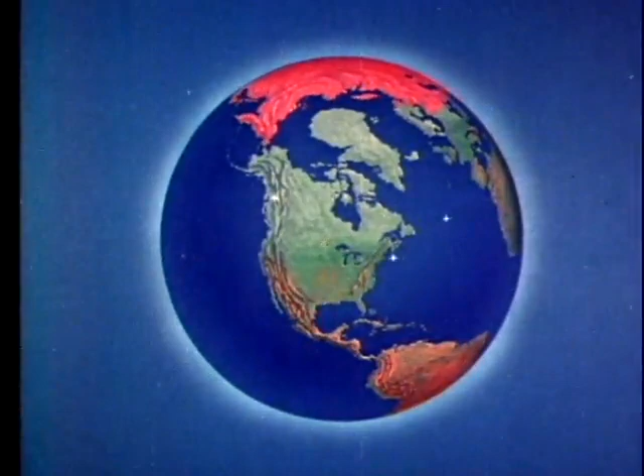Sprawled across North America, from the polar ice cap to the Mexican border, is a giant with 1,000 eyes. Day and night, fair weather or foul, he guards his homeland. This giant is the air defense system of North America, a vast and intricate maze of radar networks. And through the electronic eyes of this giant, we are able to see the enemy before the enemy sees us.

These radars never sleep. Round the clock, they stand ready to do their part in minimizing the penetration of enemy bombers. And round the clock, their quietly pulsing hearts, the magnetrons and the klystrons, help generate the power for peace that keeps America strong.

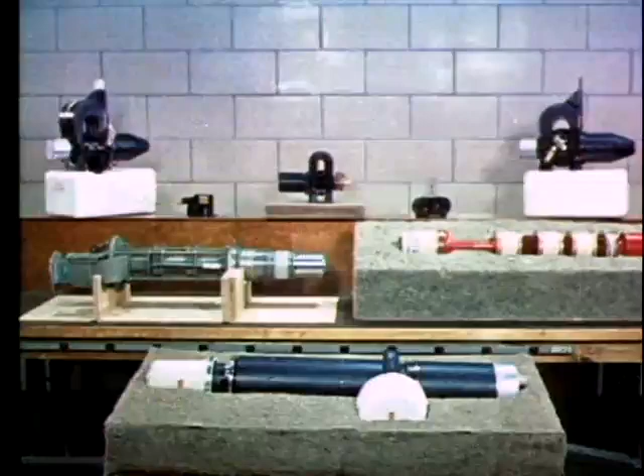These microwave power tubes, the magnetron to generate the radar signal, the klystron amplifier for radio communication, and radar are the subject of our story.

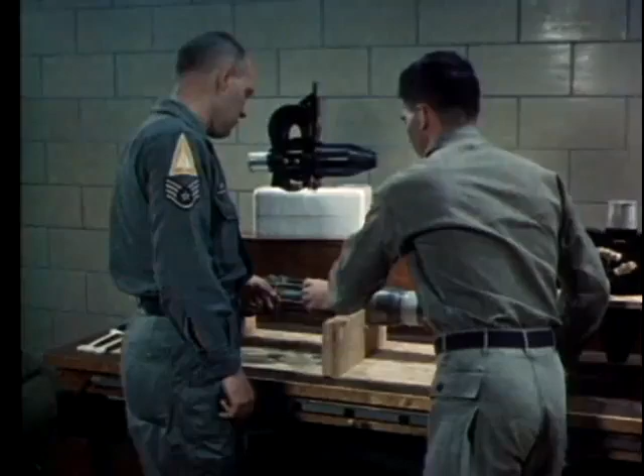It is a story about these vital tubes, but even more about you, the men who work with them. When you have a well-trained maintenance man with a well-adjusted radar at a well-chosen site, then you've really got a winning team.

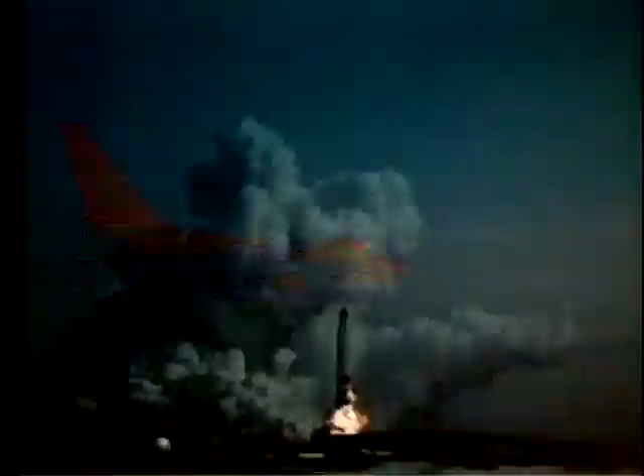They keep the airborne radars operating and ready for crucial missions - in missiles that depend upon radar for guidance, in bombers that depend upon radar for bombing and navigation, in interceptors that depend upon radar for fire control, and in reconnaissance and search aircraft that depend upon radar to extend their vision.

Years of scientific research and millions of dollars worth of equipment have gone into this aircraft. But only if the maintenance men keep the radar functioning can it complete its mission. When something goes wrong, they've got to make a quick decision, whether to attempt repairs in flight or abort the mission.

There's trouble here, that's for sure. But what kind of trouble? First, they check the radar scope presentation. Sometimes this gives a clue. But the most reliable analysis comes from the test equipment on the monitor panel.

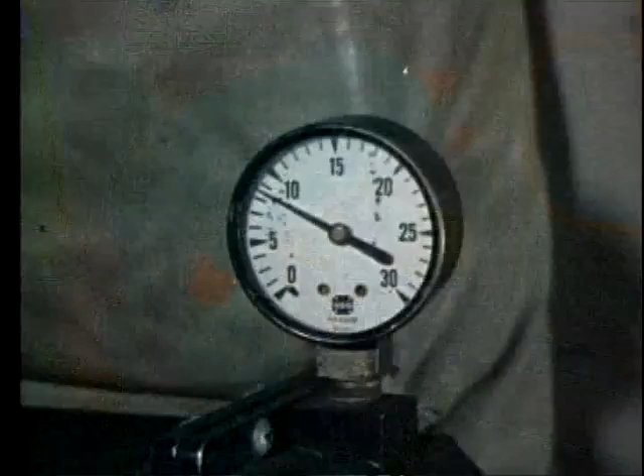The cause might be moisture in the waveguide, corrosion, dents, or scratches. Another trouble spot could be the pressurized antenna system. Loss of waveguide pressure will also cause arcing. Yes, the pressure's low. This is a danger signal. If this arcing continues, the magnetron output window may be damaged, the tube's vacuum lost, and the magnetron destroyed.

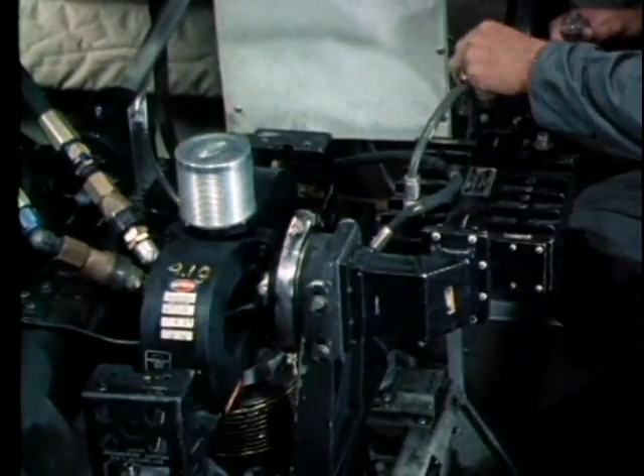Waveguide joints should be tested to make sure they're airtight. This man is making a liquid soap test. See where the bubbles are forming? He's found the trouble. But how serious is it?

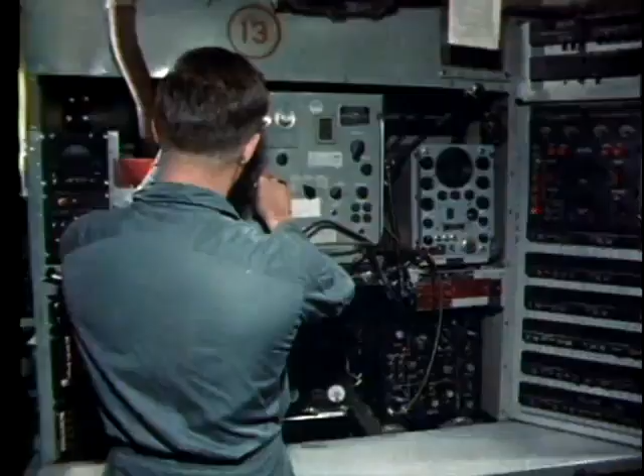He checks the spectrum analyzer again. It looks bad. See how the pulse has changed? Finally, the main pulse deteriorates completely. Bad news. The magnetron is seriously damaged. It's beyond repair. This means shut down the equipment and get ready to install the spare.

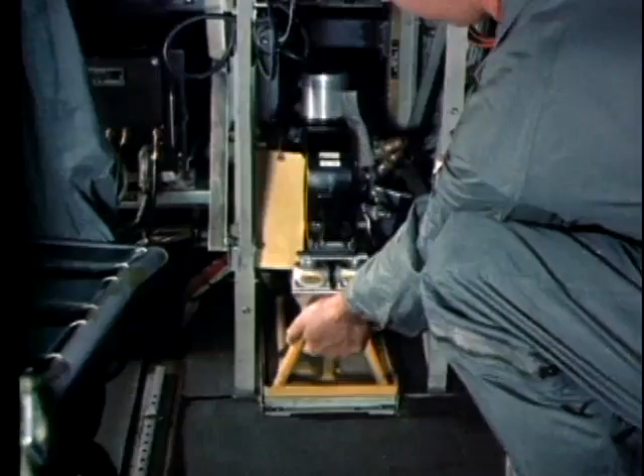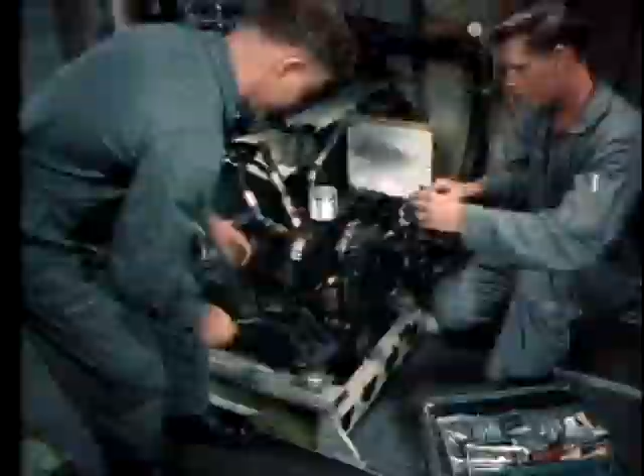While they're working, let's take a look inside the magnetron. Animation shows what caused the malfunction. We'll turn time back a few hours and show the Maggie functioning normally. As the pulse from the modulator is applied, the Maggie produces radio frequency oscillations to form the radar pulse.

This energy is then coupled into the waveguide and directed to the antenna for transmission. Energy is reflected back along the waveguide toward the magnetron. Normally, when the antenna system is in good shape, the reflected wave won't be strong enough to cause arcing at critical points.

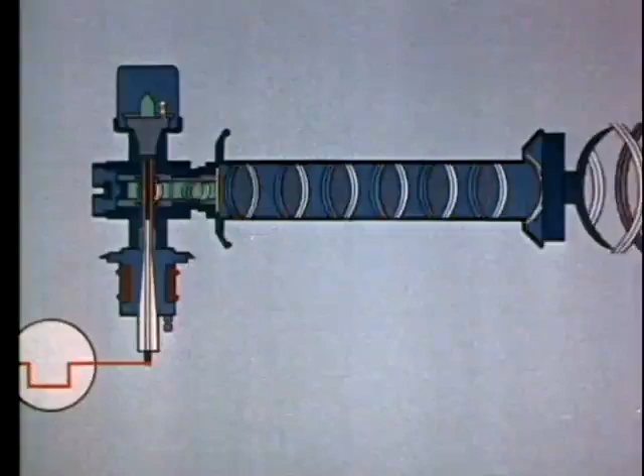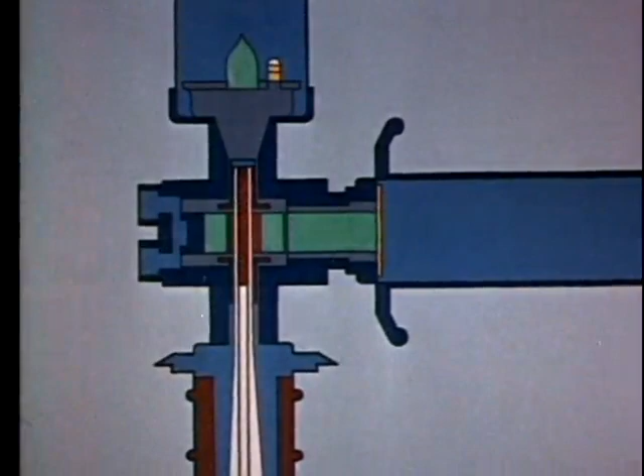But as conditions such as loss of waveguide pressure develop, the antenna characteristics change and the reflected wave becomes greater. Then arcing may take place at the point where the radar wave leaves the magnetron, causing the magnetron output window to crack or puncture. As the vacuum is lost, the heater oxidizes and burns out. The cathode cools. Air seeps into the interaction space, and arcing occurs with each pulse.

After the magnetron has been unbolted, the filament and cathode connections are uncoupled. A large magnetron like this one requires 2 men to handle it safely.

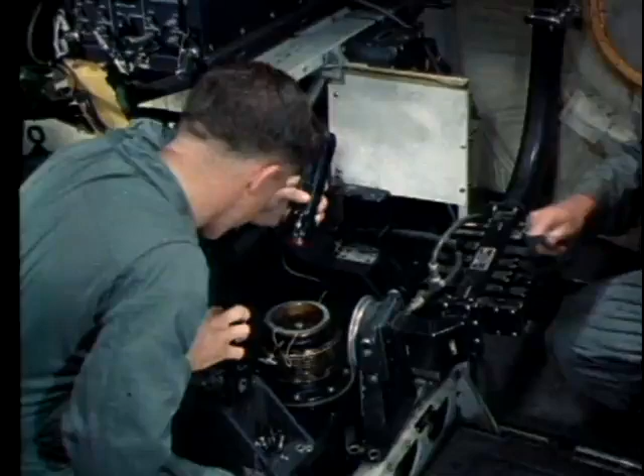Before a Maggie is replaced, all connections, mating flanges, and sealing surfaces should be inspected. Insulating oil should be examined for foreign matter. Damaged or worn gaskets should be replaced.

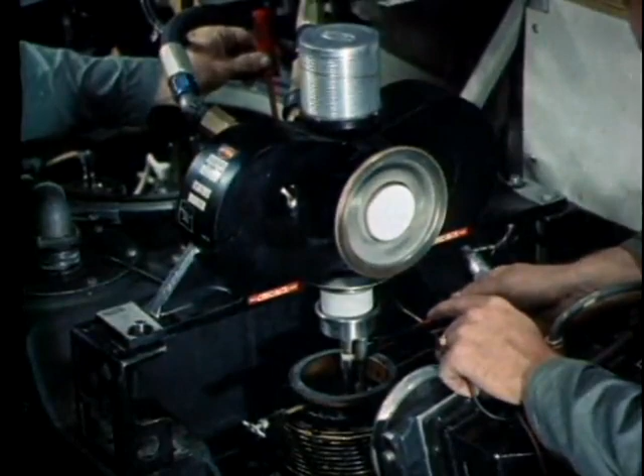Heater's supply voltage should be established at the value marked on the tube. Later, when the plane returns to base, the heater voltage should be double-checked with an accurate instrument.

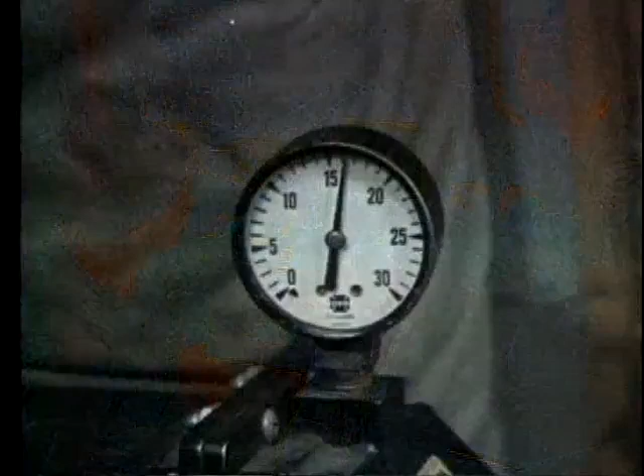Now that the spare magnetron has been installed, further tests are necessary. The technician must make sure he has the required pressure and that there are no air leaks. Instructions concerning the care of pressurized antenna systems will be found in the appropriate tech order handbook. The liquid soap method is a simple way to check for pressure leaks and may be used where more accurate means of testing are not available.

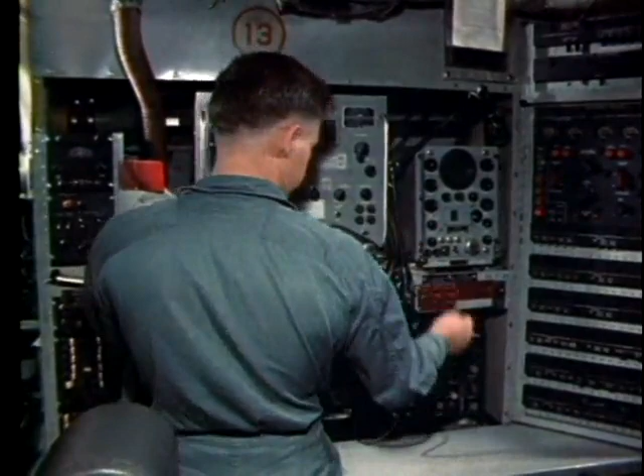Test equipment is used to analyze the performance of a newly installed tube. The output pulse is checked on the spectrum analyzer. See how the large hump or main bang is symmetrical and sharply defined. The side lobes are relatively small. A presentation like this means that the Maggie is firing properly.

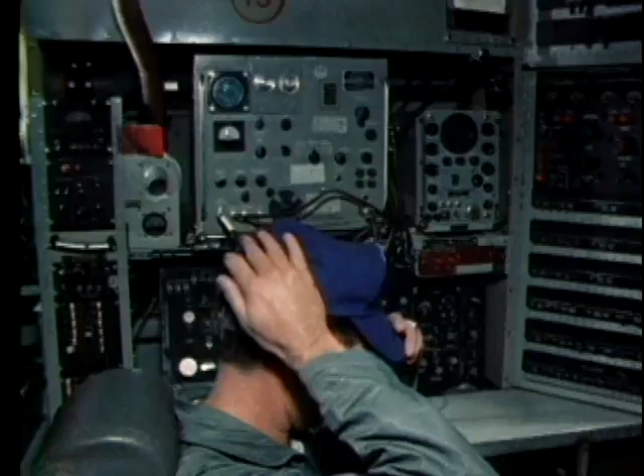Not only that, it means that these technicians know their jobs. They were able to analyze the trouble correctly and replace the magnetron in flight. Because they knew what to do, this aircraft was able to complete its mission.

Let's take a closer look at these microwave power tubes. Magnetrons costing from $100 to $10,000.

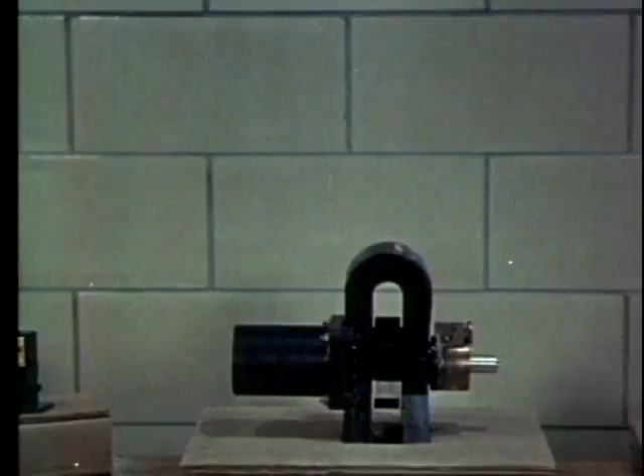Klystrons costing from $1,500 to $25,000. Why so expensive? Let's see what's inside them. Look at this. Parts so critical, they must be inspected through a microscope.

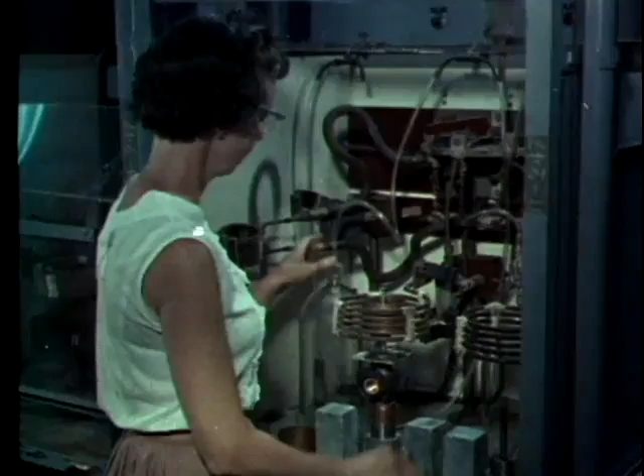Tolerances accurate to 4/1000ths of an inch. To build them to such close tolerances requires involved manufacturing processes. Specialized parts must be carefully assembled.

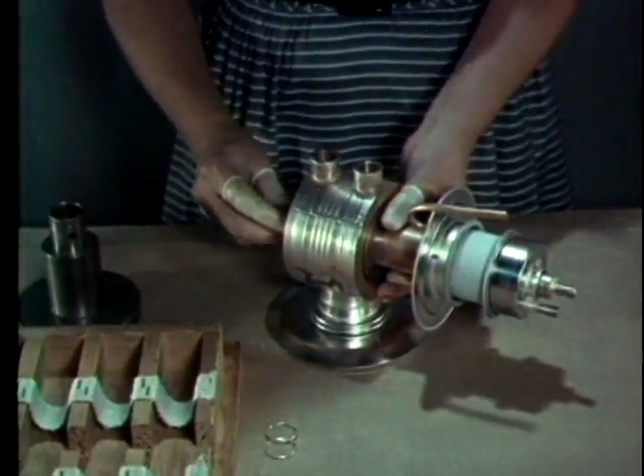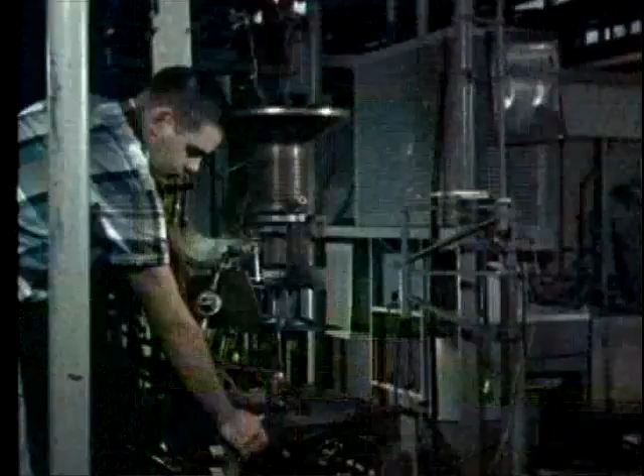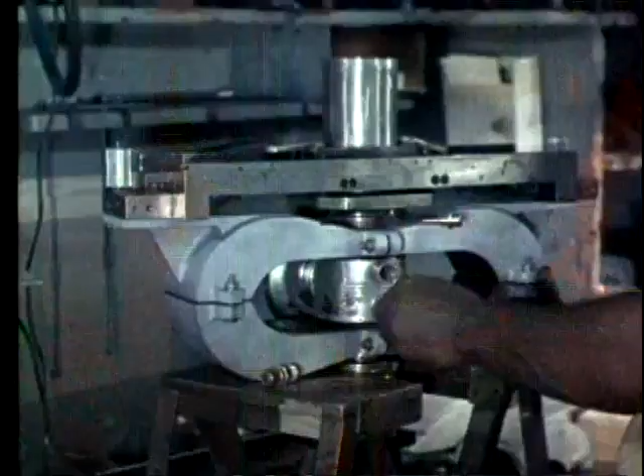The completed assembly is heat treated to bake out gas molecules, so that they may be removed by an evacuation machine. External mechanical parts, such as couplings and magnets, are installed. The final step is rigid testing of electrical performance to make sure it meets the high standards required.

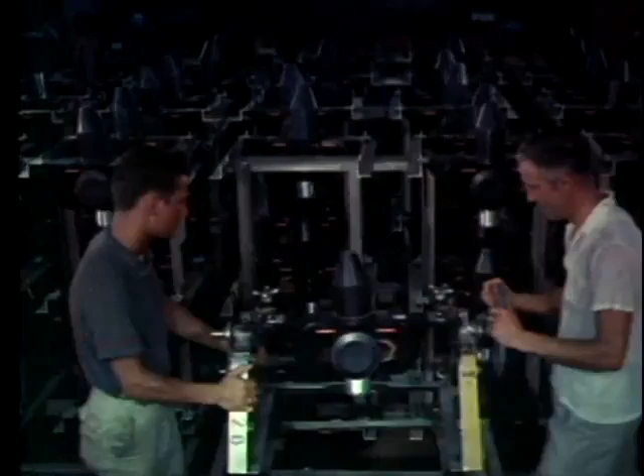Pressure tests ensure leak-proof connections throughout. Now the tubes can be put into storage. Even here, should tiny defects develop while on the shelf, continuous sample testing will reveal them. Before shipment, the delicate tubes are carefully packaged.

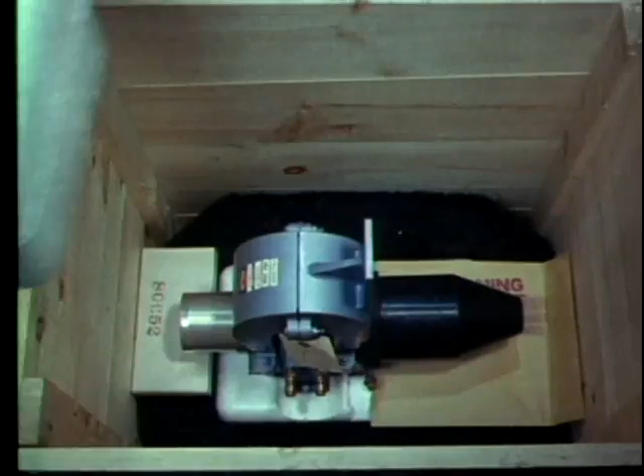The quality designed in during research, built in during manufacture, maintained by rigid testing and careful storage, will reach the user intact.

Here are a few basic rules on proper handling. Always use 2 men to lift a heavy tube. A portion of a carton makes a good tube stand, protecting delicate parts from damage. But a wooden rack is better and lasts longer.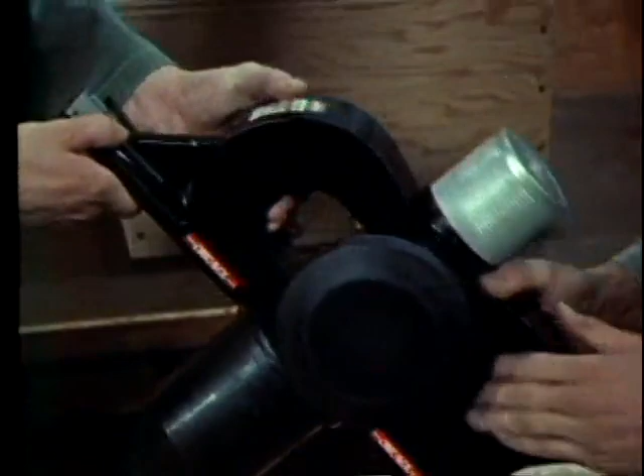Save all the cartons and packaging materials. Use them to return defective tubes to the factory.

Magnetrons should be separated at least 12 inches. Then their magnetic fields won't interlock. Don't store them on steel shelves or they may be degaussed.

Don't use steel tools. Use non-magnetic tools. Following these simple rules will save time and trouble, prevent damage, and save the Air Force many thousands of dollars each year.

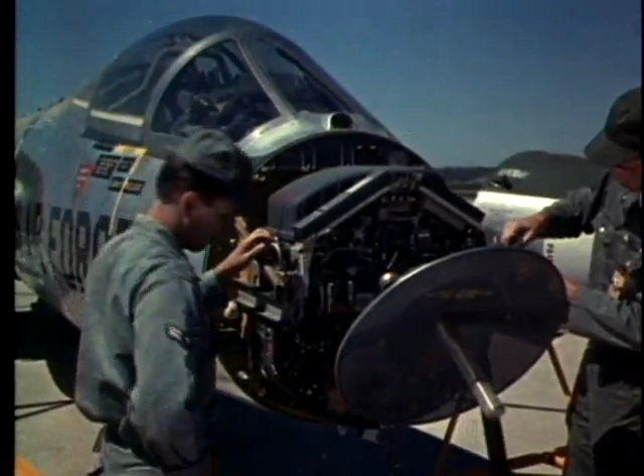On most of the smaller high-performance aircraft like this one, it is not possible to do in-flight radar maintenance. Therefore, most of the work must be done in the electronics maintenance shop.

This aircraft has just aborted an intercept training mission. The reason: radar malfunction. Had this mission been the real thing, an enemy bomber could have broken through our defenses. The maintenance man's job is to find out why the radar malfunctioned and correct the trouble.

You'll see that although these radars come in smaller packages than those on larger aircraft, they are just as big a maintenance problem. The maintenance supervisor is in charge of this work.

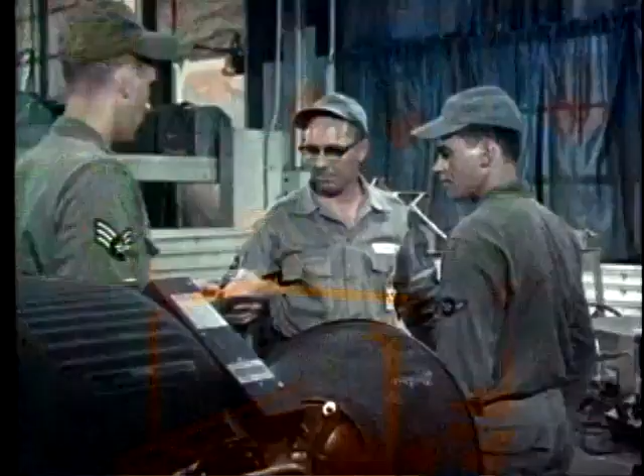Before teardown of a defective black box is started, the operational defect should be identified or at least isolated to a particular subchassis. The pilot's report on the radar failure may give a clue. Comparing the report of malfunction with equipment handbooks may also help to isolate the defect. But the best aids to repair are the analytical approach of the technician and the special test equipment he uses.

An important point to remember is that the transmitter malfunction may be caused by parts other than the magnetron. Wherever possible, other circuit components should be checked before power is applied.

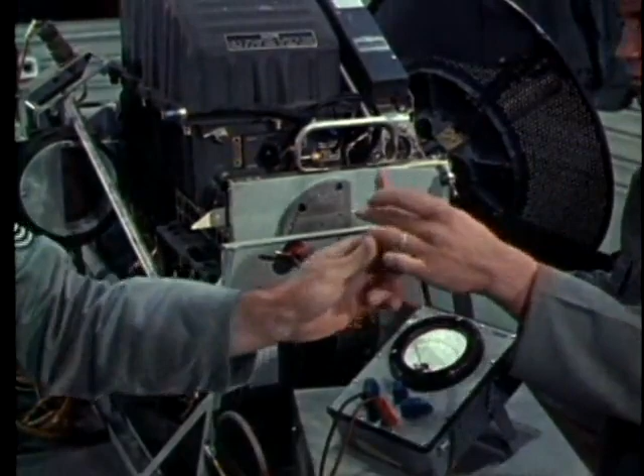A simple resistance check will often reveal a short circuit. That's what the trouble is here. The airman will carry on from here and trace the short circuit.

So far, so good. He's found a shorted filament transformer and replaced it with a new one. But what's this? He's decided to change the magnetron, too.

The supervisor disagrees. Tube swapping is not a good idea. The old magnetron should be thoroughly tested before any decision is made.

Testing showed that the old magnetron should be replaced. This has been done. Now let's see how the new Maggie behaves.

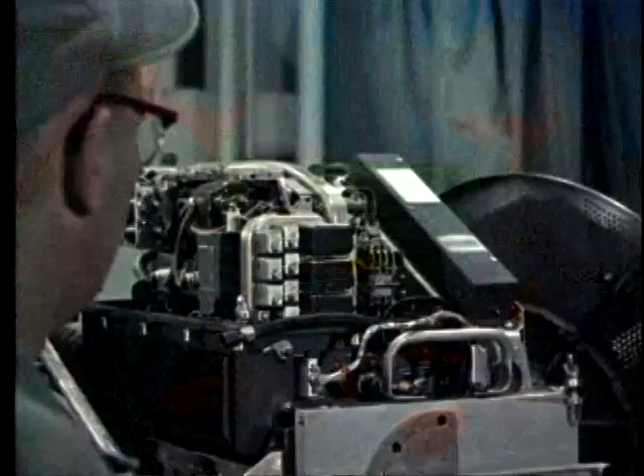This is confusing. The spectrum analyzer shows arcing. Let's look inside the tube and see what's causing it.

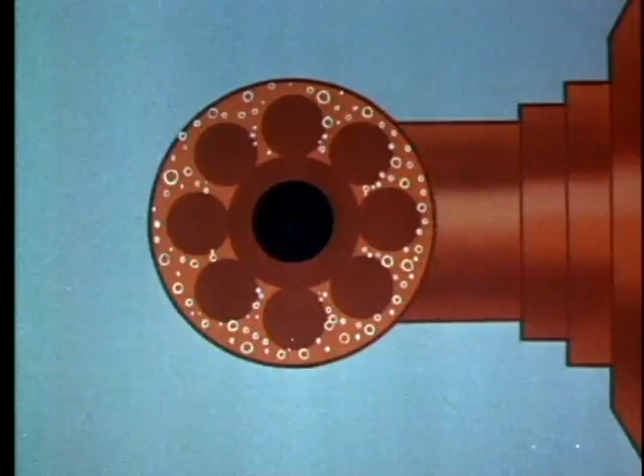Magnetrons are made of porous metals, which usually trap a small amount of residual gas. During storage, gas molecules migrate into the interaction space surrounding the cathode. When the tube is installed and power applied, it will operate normally if the gas content is low.

But if gas content is high, arcing will occur with each modulator pulse. This arcing might be mild or severe. Frequently, tubes with residual gas can be restored to normal operation by a suitable break-in or seasoning period.

During break-in, the gas molecules are driven back into the walls of the tube, and normal operation resumes. If the equipment is operated frequently, normal operation should continue throughout the life of the tube.

Occasional individual arcs may also be noted in a normal tube which does not contain gas, but this behavior is due to transient conditions and should be considered normal. All new tubes which display arcing when they are first installed should be thoroughly tested and analyzed before being discarded. This will save the government both time and money.

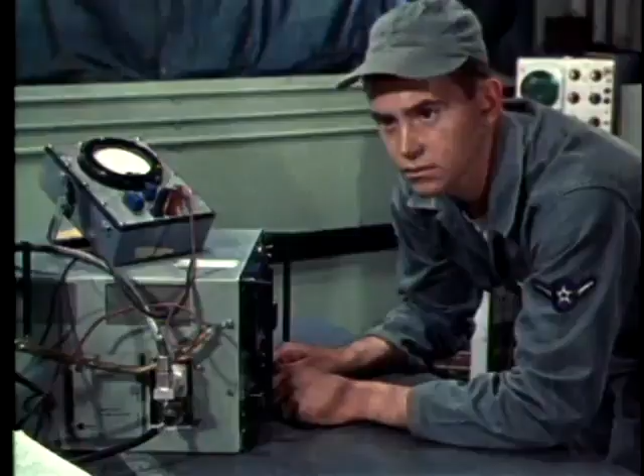The repairs are finished. Now comes the break-in procedure. Proper break-in can clear up various degrees of internal arcing. But watch the spectrum analyzer carefully. If frequent arcs occur, switch to standby immediately.

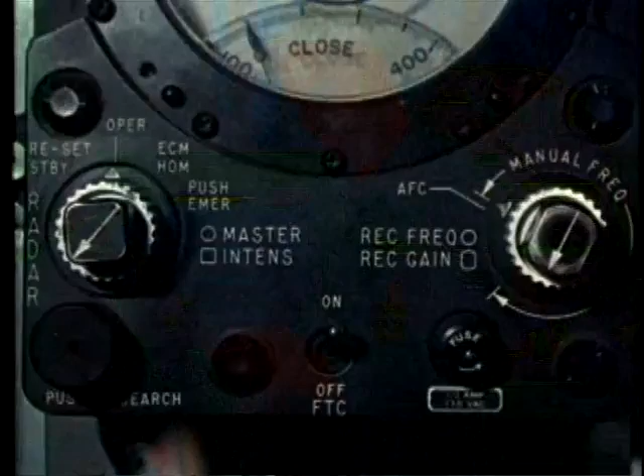Small magnetrons may be damaged if severe arcing is allowed to continue more than 2 seconds. Now the range selector switch must be changed to short pulse before the magnetron is operated.

If only sporadic arcing occurs, the operation may be continued. But a series of arcs may cause the overload to pop. In this case, reset the switch and continue the break-in.

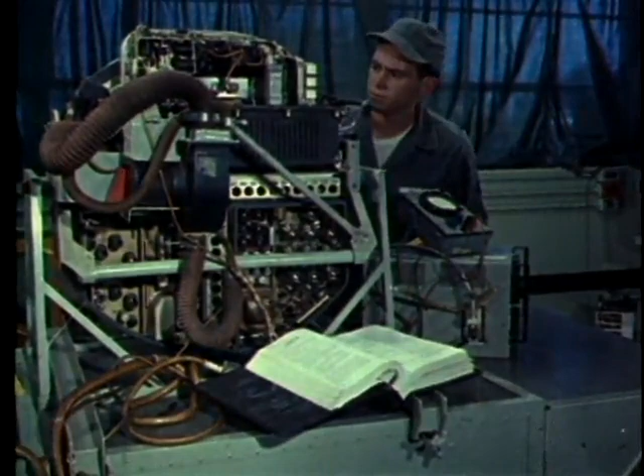To avoid possible damage during the break-in, the technician should keep a close watch on modulator tubes and other components of the RT unit. The time required for break-in will vary with the tube, conditions, and methods used. But normally, break-in can be accomplished in 20 to 60 minutes.

When break-in is complete, and only infrequent arcs or misfirings occur, operation may be regarded as normal, and the equipment made ready for service.

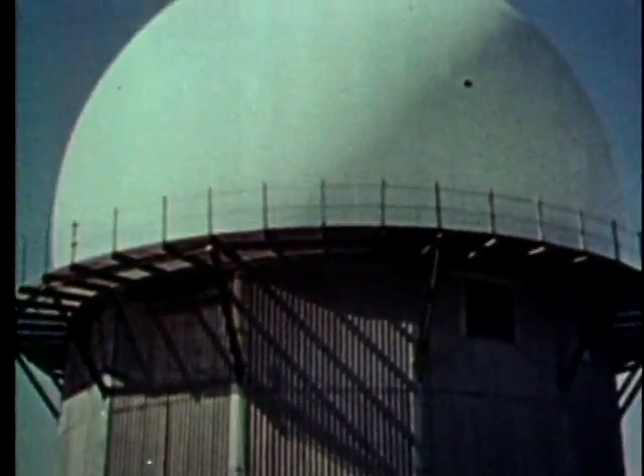In addition to the airborne radars, there are a great many ground radar sites scattered about the continental United States and Canada. They are found in almost every type of American scene: in the dusty expanse of the plains, in the Northwoods, the heat and humidity of the deep South, in the rolling farmlands of the Midwest, and the saltwater scenes of our coastal areas.

Each of these has its own problems of maintaining and efficiently operating its microwave power tubes on a round-the-clock basis.

Some of this equipment is completely automatic, but experienced technicians are always nearby, just in case. At the many radar sites where there is no standby equipment, the maintenance man is an even more vital unit in the organization.

In the operations room, observers keep constant watch on the radar scopes. Here's trouble developing.

When equipment starts to malfunction, quick repair is a must.

These men are so used to the sound of the equipment, they can tell by listening whether the magnetron is operating or not. It's not.

Something caused this radar to quit. What was it?

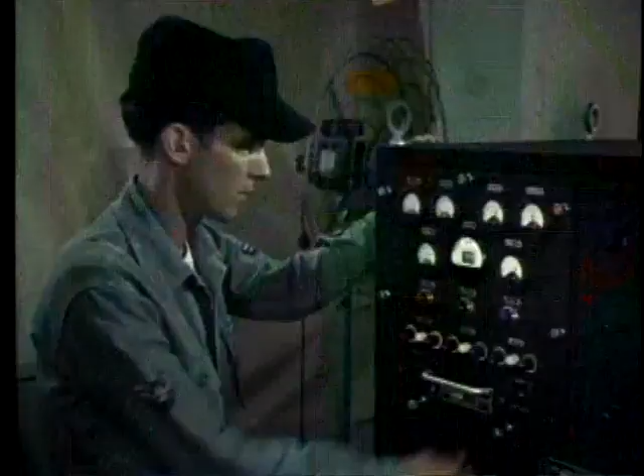Sometimes the meters will tell the story. The filament current has dropped to zero, and the filament voltage is too high, indicating that a portion of the heater element is open. A quick, careful analysis has to be made.

Here is where maintenance skill and training pay off.

The question is, has the magnetron become inoperative because of heater failure? Or is there another cause?

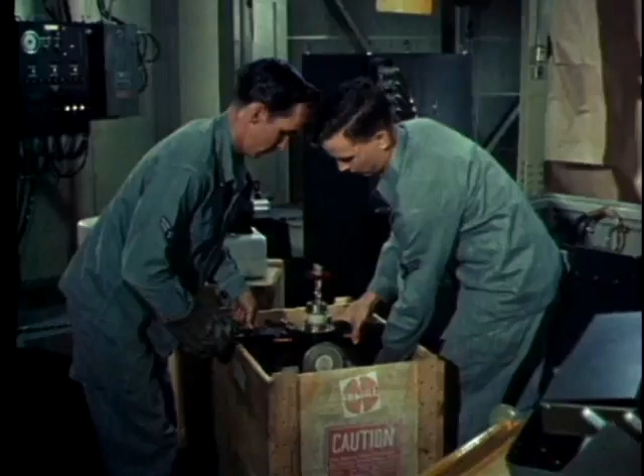Yes, here's something. The insulator is pitted. High-powered magnetrons like this one have insulator bushings immersed in oil.

It might be that the insulating oil has broken down. Better check this. Here's the answer: contaminated oil. The oil failed to insulate.

Oil can break down after long exposure to heat and high voltage. Oil may also be contaminated by dust, moisture, metal particles, or air bubbles.

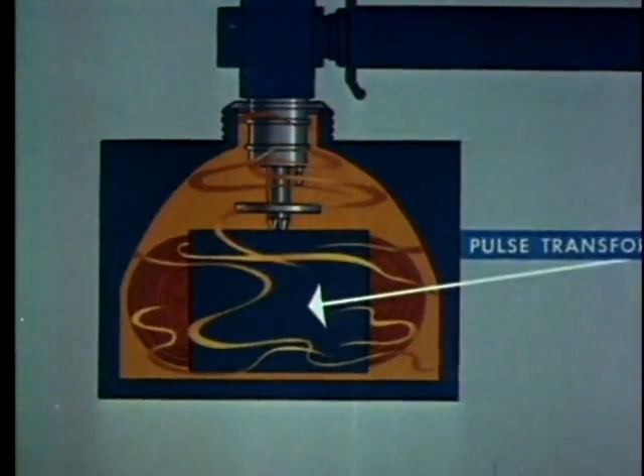Here is how contamination breaks down oil. As contamination accumulates in the oil, current paths are created between high voltage terminals and ground.

As the condition becomes worse, due to increase of contamination and change in oil structure, a definite high voltage path for corona discharge is created in the oil. The corona discharge begins to erode the surfaces of the insulator. As the insulators are penetrated, the vacuum in the tube is destroyed, and the tube is damaged beyond recovery.

The maintenance men have completed oil replacement using all precautions to prevent contamination. They have checked the grade of oil against tech orders and factory instructions.

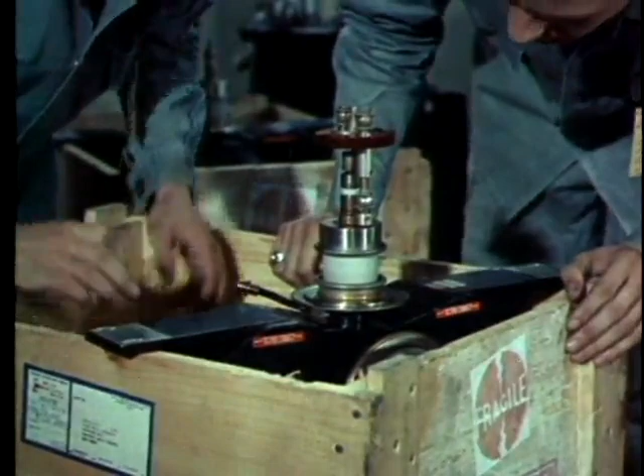But before installing the new Maggie, all mating surfaces and flanges must be inspected and cleaned or replaced as required. It is also necessary to check waveguide parts, replace gaskets, coolant hoses, oil fittings, and so forth.

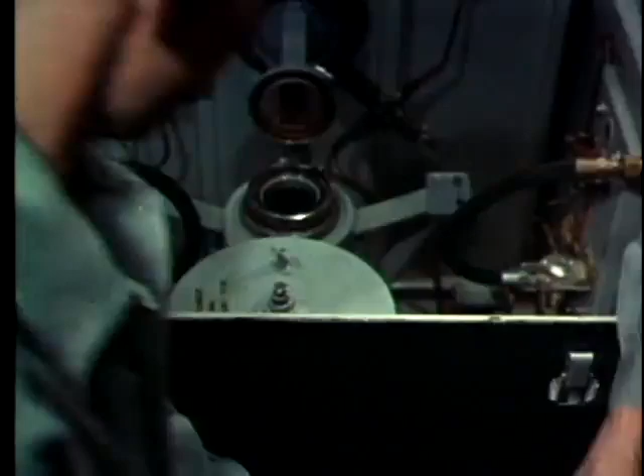Be sure all electrical connections are secure. Careful, watch out that terminal doesn't hit the cabinet. That could ruin the tube.

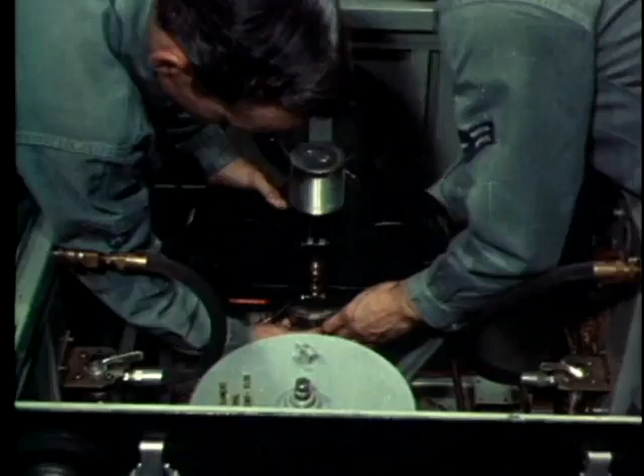Make certain that all clamps, bolts, coolant hoses, and so forth are secure before operating the tube. All set? Okay, hit the power button. Uh-oh, that one didn't last long.

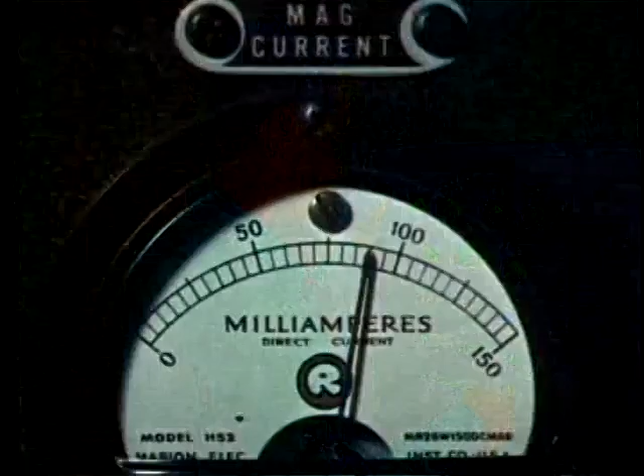There are many reasons why new tubes may fail to function properly. One of the primary causes of tube failure is damage sustained during transportation and handling. This damage may occur during shipping or in the depot, or during Air Force distribution to the base.

Here is what actually happened to that new tube which failed to operate. Nobody saw it happen.

Nobody's going to tell, and nobody's going to get the slightest use out of that magnetron. But these men don't know this Maggie fell off a truck. They just know it won't work.

Could it be something wrong with the rest of the equipment? A short circuit? A bad connection? Or should they pull out this Maggie and install another?

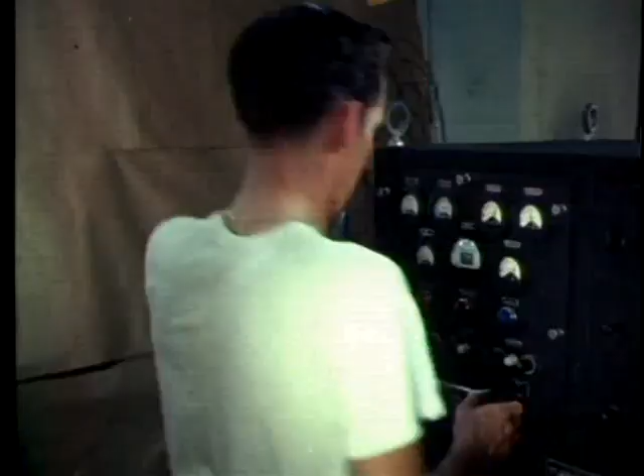They've installed another new Maggie. They've also followed correct procedure, allowing the heater to warm up 5 minutes before applying power to the anode. Ah, it works.

But wouldn't it have saved them a lot of time and trouble and expense to the government if that delivery man hadn't dropped the Maggie off his truck? You see, the maintenance man really is important. If he does his work correctly, so will the radar.

The magnetron is only one type of microwave power tube used by the Air Force.

Another and very important type is the power klystron. Klystrons are made in many shapes and sizes. All of them are powerful and expensive, ranging from $1,500 to $25,000.

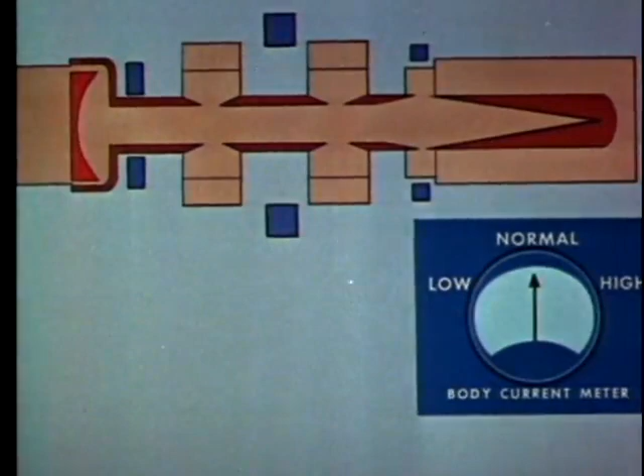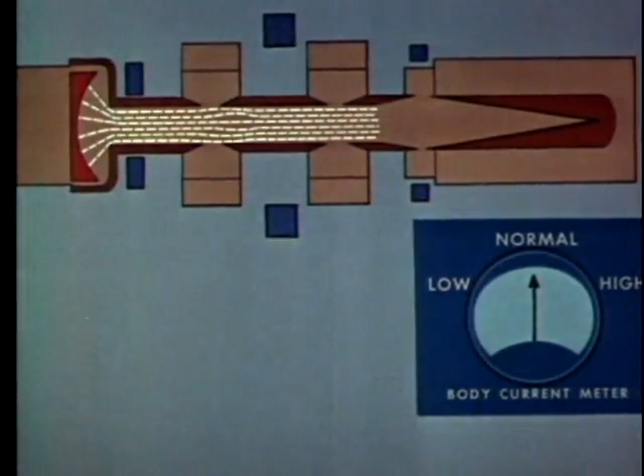Let's look inside a typical two-cavity power klystron and see how it operates. The beam current is emitted by a heated cathode and passes through the drift tube sections. Since electrons in the beam have like charges, they repel each other and tend to diverge, to be absorbed by the walls of the drift tube sections. But electromagnetic coils placed along the tube align them into straight paths. However, misalignment of the focus coils can seriously damage the drift tube tips. Therefore, it is most important to adjust the magnetic coil currents properly during installation of the tube.

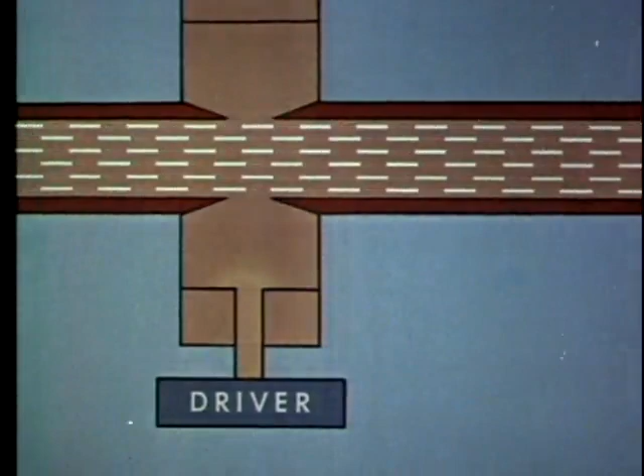When a steady direct current is flowing through the tube, an RF signal from the RF driver stage is introduced into the first cavity resonator. As the cavity is tuned to resonance, a strong RF field appears between the drift tube tips, which form a gap in the resonator. The electrical charges on these tips alternate at the driver frequency rate on opposite sides of the gap. At the same time, individual electrons in the beam are being accelerated or decelerated at the RF frequency rate.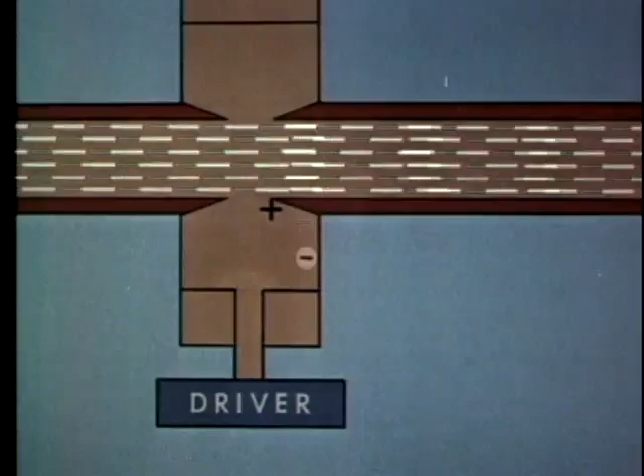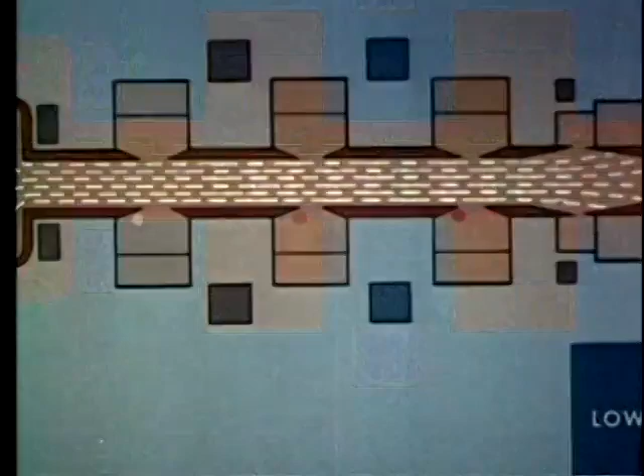This produces bunching of the electrons as they approach the gap in the second resonator. There they are decelerated and release energy. The resonator converts this energy to RF energy and amplifies it. Additional resonators are sometimes provided for greater amplification. From the last resonator, the amplified RF signal is coupled into the waveguide and transmitted to the antenna.

Various kinds of klystrons are being phased into new Air Force applications, such as these tropospheric scatter communications transmitters. In this way, intelligence may be relayed from remote early warning sites to control centers many hundreds of miles away.

This transmitter has dual equipment. One transmitter operates while the other is on standby in case of emergency. The equipment is automatic. Meters and instruments keep a constant check on its operation, and a warning light flashes in case of trouble.

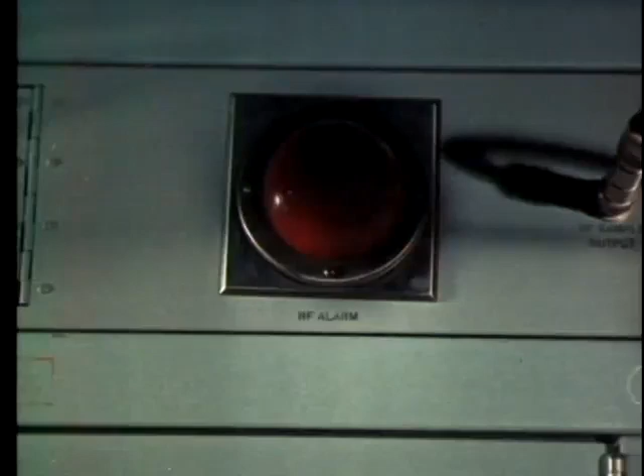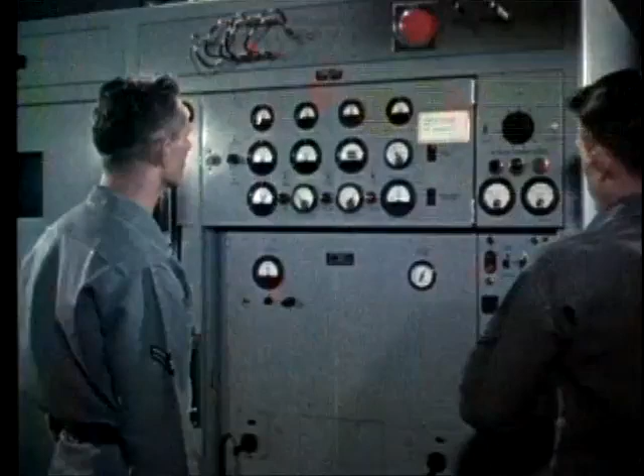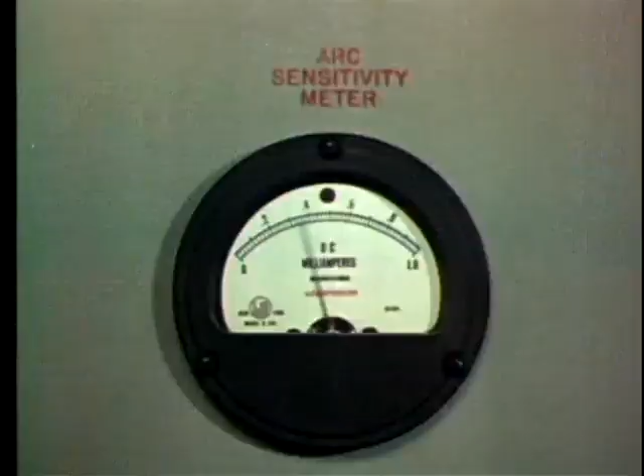And speaking of trouble, a glance at the meters tells them the trouble is in the transmitter output. The equipment is reoperated. Readjustment of the output cavity and coupler may correct the trouble, but the arcing continues. Since adjustment won't correct the trouble, all they can do is shut down the transmitter for repair and switch over to standby.

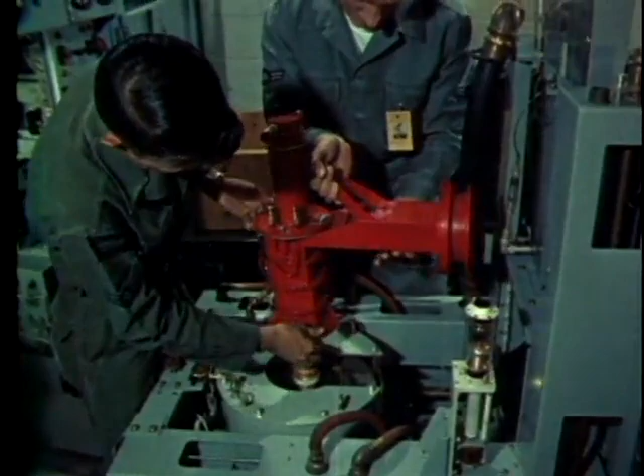The klystron has been removed for inspection. It may have been damaged by the arcing. Yes, the output ceramic is badly damaged.

An important consideration in maintaining the klystron is the proper adjustment of the impedance matching unit. In this case, improper adjustment of this unit during installation ultimately caused the arcing in the output section, which in turn destroyed the tube.

There are two types of meters which help maintain proper coupling: the power output meter and the VSWR, or voltage standing wave ratio meter. These measuring devices should periodically be checked for accuracy. But in general, the best way to avoid damaging or destroying the klystron is to study and thoroughly understand the various installation and operating instructions furnished by the equipment and tube manufacturers. Only by doing this can Air Force technicians and maintenance men hope to get the full operating life from their klystrons.

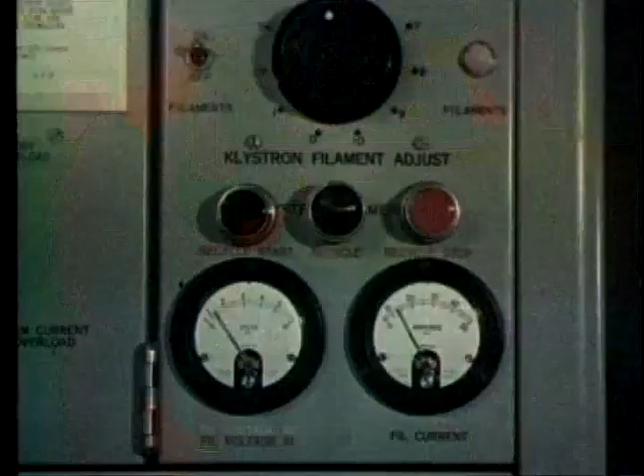At the Tropo Shack, the maintenance men have installed the new klystron. But before operating at full power, they are careful to recheck all circuit meter readings and coolant flow gauges. These meters are important because a minor error in one of the adjustments might shorten the life of the tube.

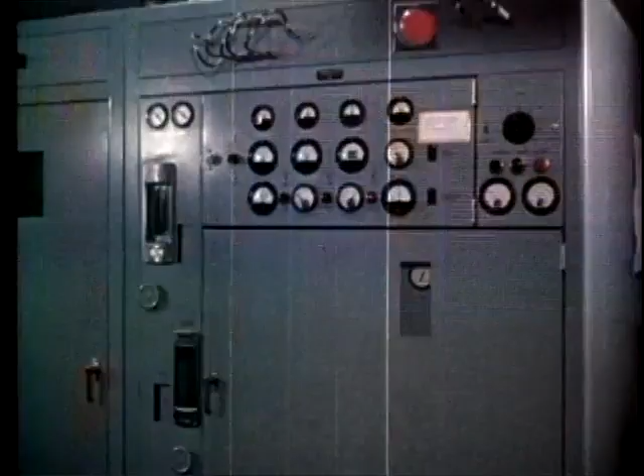The power klystron is really a very dependable piece of equipment if properly treated. Once it has been correctly installed and aligned, it requires very little maintenance during its long service life. A good rule to follow is: install it carefully, align it properly, then leave it alone.

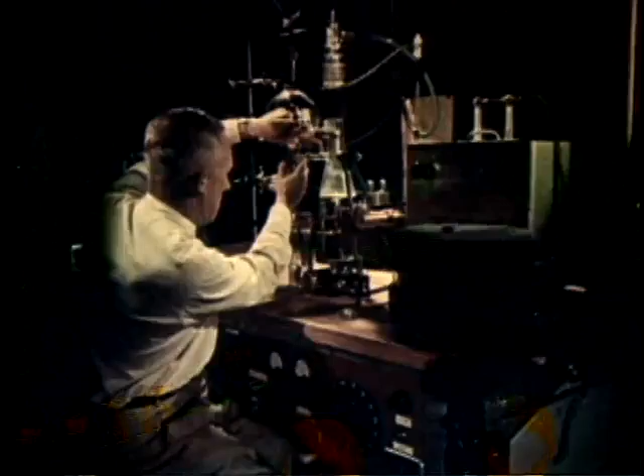As the progress of aircraft and air defense continues, other and more varied uses will undoubtedly be found for microwave power tubes. With these new applications will come new problems to be solved by maintenance men of the future. Those men will tread the paths charted by technicians of today who found that this type of maintenance can be simplified by careful attention to four basic factors: careful handling, proper break-in, avoidance of tube swapping and trial and error maintenance, and the timely use of maintenance aids such as test equipment, tech order handbooks, and manufacturer's information pamphlets.

There is no substitute for know-how, initiative, and ingenuity. Yet no one man or group of men can do this job alone. Maintenance is a team effort. Only by the cooperation of procurement, supply, transportation, and every department concerned can the Air Force continue to operate the reliable radar equipment which is such a vital part of national defense.

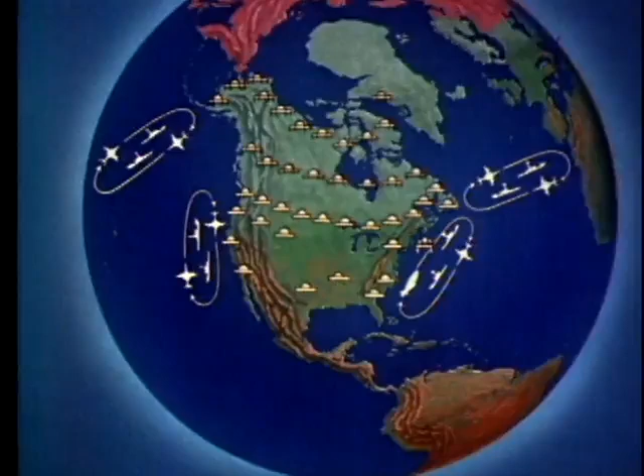Only by continued teamwork and devotion to duty can the radar eyes of America guide us to that peaceful tomorrow, which is the reward of nations who stay alert today and every day.